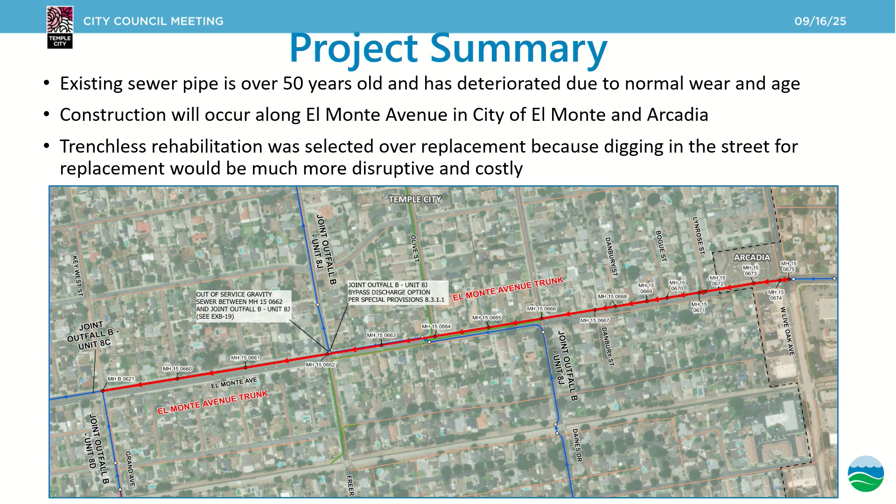So the district has opted to rehabilitate this trunk sewer by means of CIPP in comparison to doing a remove and replace. By doing the CIPP rehabilitation, we're able to be more cost effective, have a lower duration for construction, and we're also going to be putting in a traffic control plan that is less impactful to the residents of your city.

The trunk sewer itself is 3,800 feet, going from Key West Avenue to Live Oak, and is a 12-inch sewer. There are 17 manholes in that section that we will be rehabilitating as well, applying a spray coating protective enamel on it.

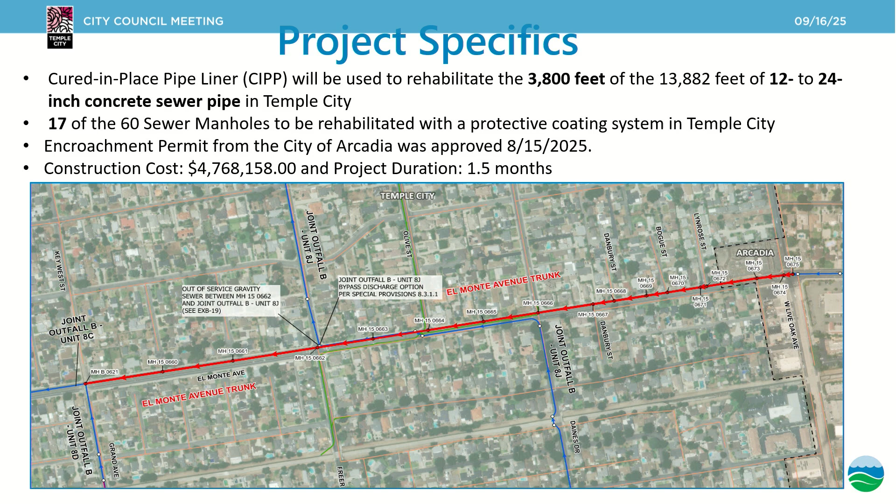We just want to let you know, looking at the image, the dotted line on the right side shows that a portion of this trunk sewer is in the city of Arcadia. We did execute the permit with that city, and we're able to do the rehabilitation on that side. So with your approval after this presentation, we'll be able to start work on the other side of the sewer in Temple City. I believe we've already executed the permit as well.

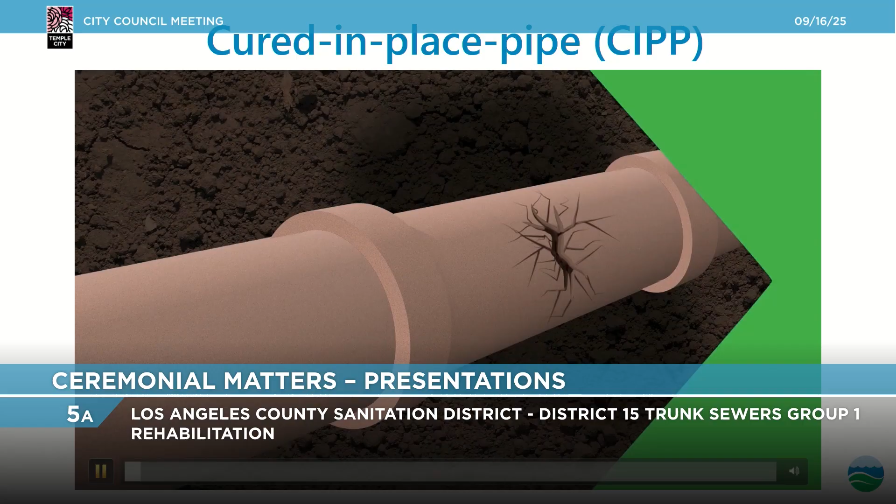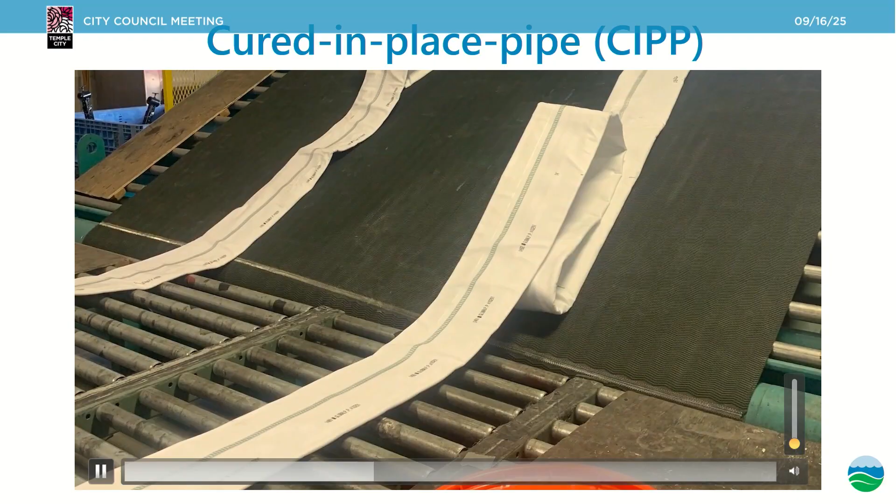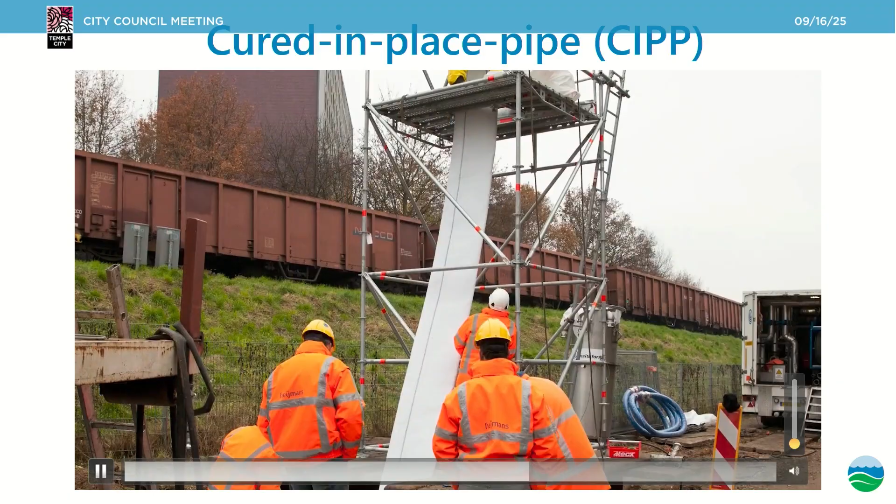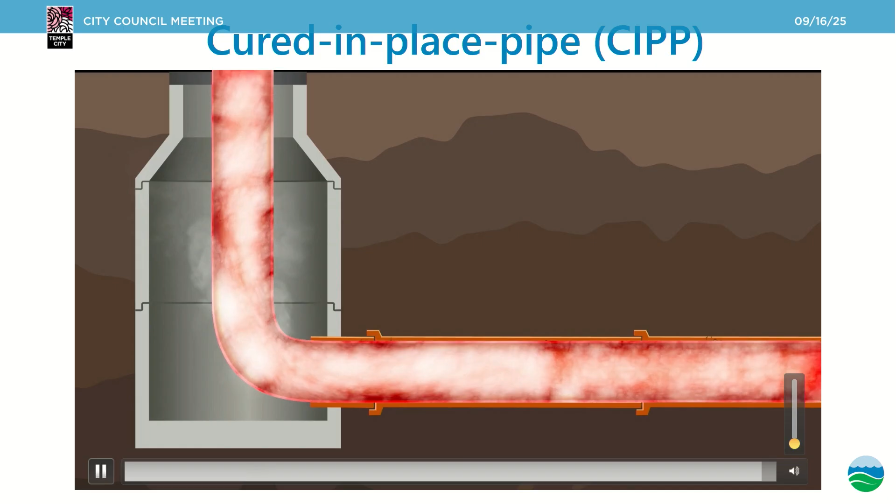Right here in question, we have an underground sewer that has deteriorated over time, and we're going to begin by doing the CIPP lining. We access the sewer through a manhole, inject resin onto a lay-flat hose, and push it through the sewer from manhole to manhole, injecting air to fill the space. Essentially, that resin coats the inside of the concrete, making a pipe within a pipe. As you can see in the picture, there is steam, heated vapor going through that pipe to cure the resin faster and shorten durations.

Let's go to the next slide. In terms of the CIPP lining, there are several phases to this construction. First, after approval from this presentation, we'll most likely start October 6th. The dates are tentative, but in terms of phases, we'll start with CCTVing, inspecting the line itself, and then going into sewer cleaning. Residents will not have to worry about any service interruptions for this part of the construction.

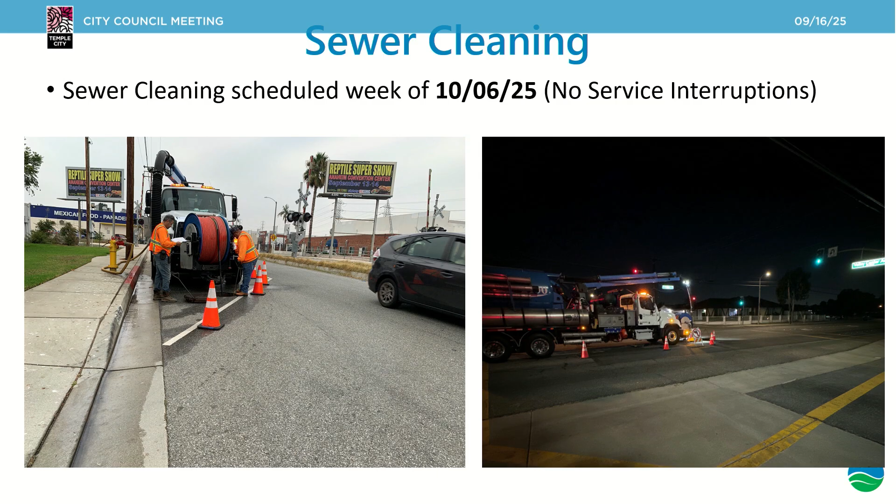Just to let you know, when we do the bypass, expect no service interruptions. Only when we do the CIPP lining will we expect service interruptions.

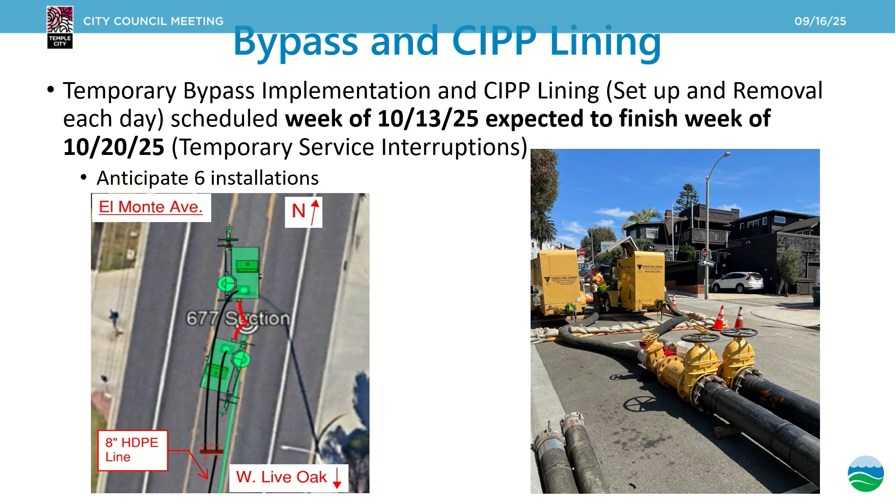Next slide please. Here is a typical setup of our CIPP lining. We'll have a truck on the north side of the manhole injecting felt resin into the sewer. On the right, if you pass by the field and see that procedure going, you'll see steam—that's just from the resin being cured, so nothing to be alarmed about.

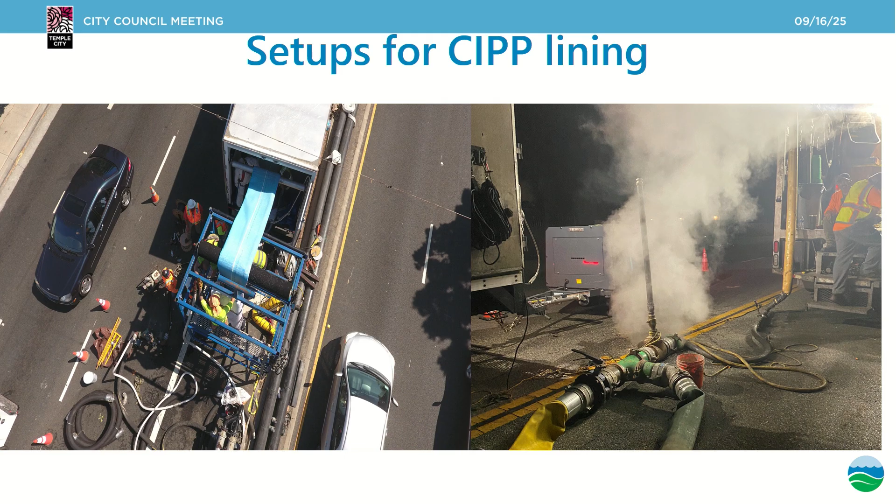Next slide please. May I ask a quick question—you're doing manhole to manhole, right, sections at a time? It will not be the entire sewer, correct? We will be doing sections, yes. So the entire section won't have a total service interruption, only sections. Exactly, yes—whoever's impacted within that section. Correct, and we will give notice, which I'll cover in the next coming slides.

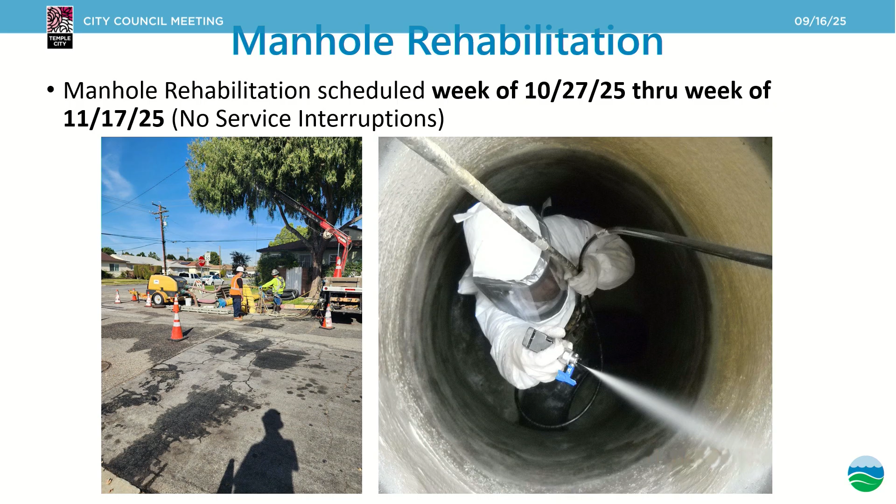After the CIPP lining is finished, we will tear down the bypass and demobilize the CIPP lining trucks, moving to the setup on the left. We'll just be taking up space to secure ourselves for the worker going into the manhole. This procedure will be done for 17 manholes, only taking up a small section of the street.

Go to the next slide please. For this work, our contractors will alert the public three specific times—14 days, 7 days, and 24 hours in advance. Expect service interruptions to occur between 8 a.m. and 4 p.m., which is when our CIPP lining will start. Residents should refrain from discharging any quantities of water down their drains during the interruptions if possible, and if needed, we do have toilets and hand washing stations available for residents who require them.

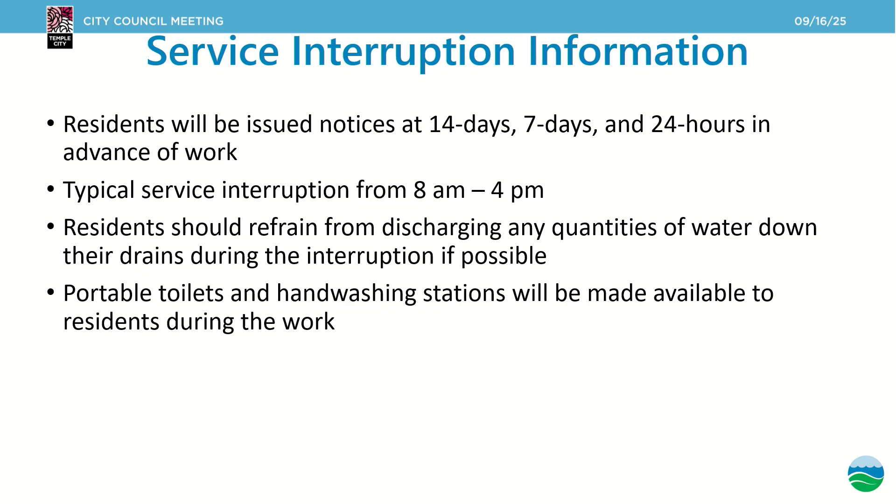So those 3 notifications from the contractor, the 14 days, 7 days, and 24 hours, they will send you those notifications. This is a 4th notification from the district ourselves. We have an English version and a Spanish version of the work that's happening, the locations, our names, emails, numbers, if you need to get in contact with us for any situation or concern.

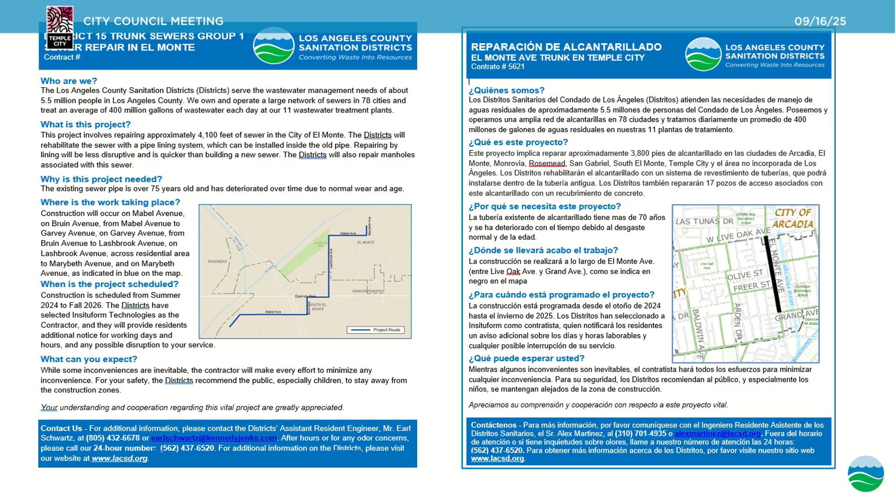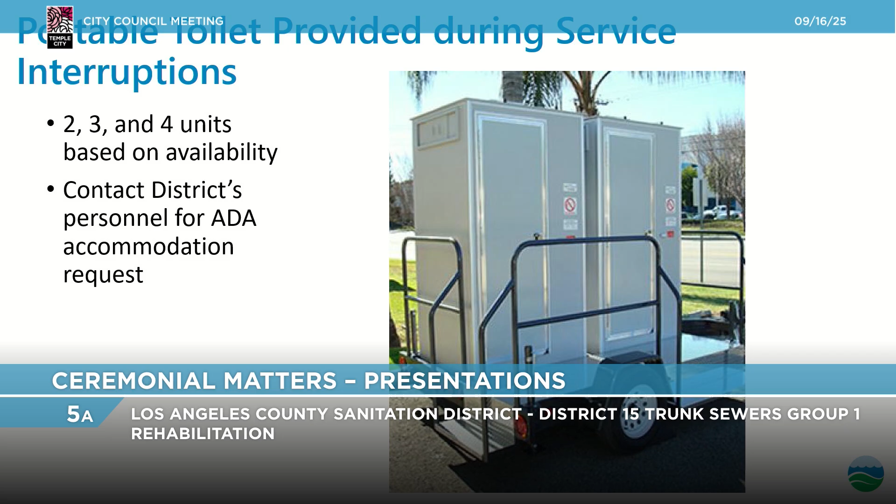I would believe it's one unit per cluster of homes, but if needed, we could bring out more if the demand is higher. So would that only be brought out if residents requested it? Correct, yes, I believe so.

We will have some available by default, and we ask residents to reach out to us if they require ADA compliant toilets. As you can see, those are not ADA compliant, but we have ADA compliant ones available.

You read my mind, so I'm not going to ask my next question, but I do have a follow-up. So residents will be notified how many days ahead of time of the interruption? 14 days, 7 days, 24 hours notices. So if they're notified and then call you within those days, you'll be able to provide them what they need. Not everybody will ask, but since you're only interrupting one day, if they're able to call whenever, we're going to answer them, yes.

We wouldn't allow the contractor to continue unless they have these accommodations, especially if a resident has reached out to us. Okay, got it. Thank you.

And just for our own edification, are the impacted homes only those along El Monte that have a lateral directly into this pipeline, or will it impact homes along Live Oak near the intersection of El Monte? I know that, or Michael can handle it. I only know that any laterals connecting to us will be impacted.